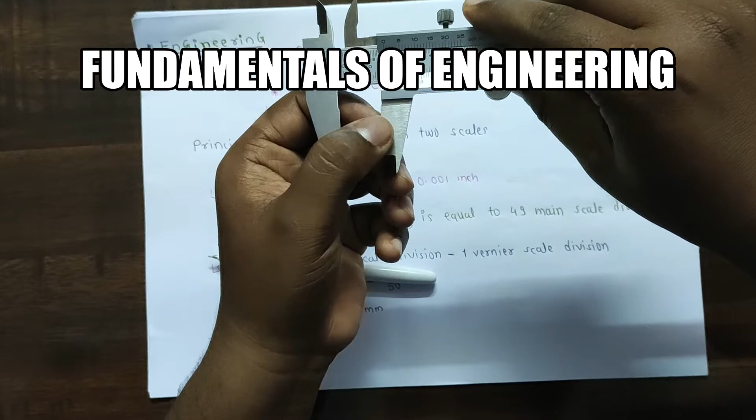This is the fine adjustment screw. This is the locking screw. The locking screw is used whenever we measure the dimension between these two jaws. We have to lock the dimension so that once you remove the part from the jaws, the dimension will not change, and then you can take the reading.

This is a depth measurement bar. Whenever we want to measure the depth of any part, we use this depth measurement bar.

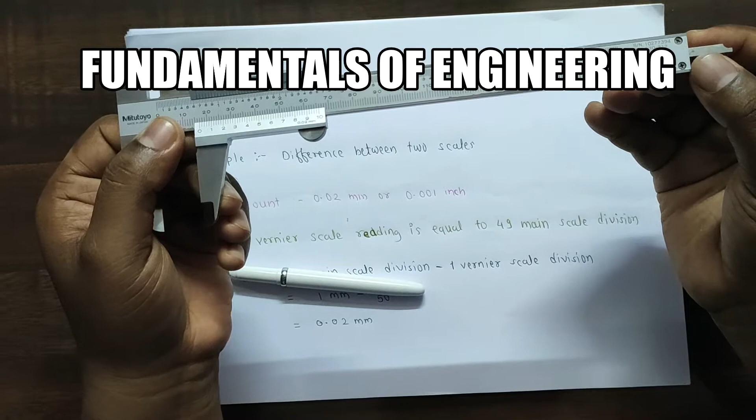Now the principle of the vernier caliper is the difference between two scales. So what are these two scales? This scale is the main scale and this is the vernier scale. The above scale gives the dimension in inches, and the bottom scale gives the dimension in mm.

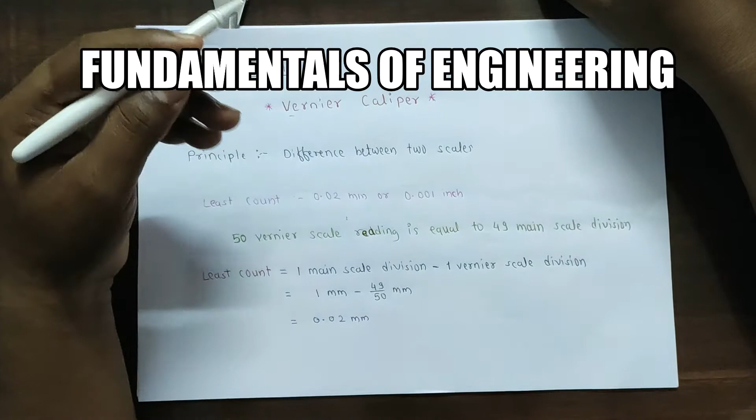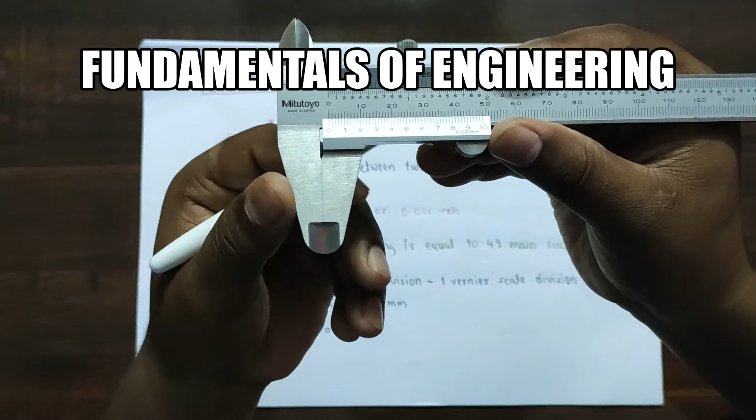Now we have to find the least count of this vernier caliper, which is 0.02 mm or 0.001 inch. How do we find this? You can see when I match the fixed jaw with the movable jaw, the 0 of the main scale and the 0 of the vernier scale are matching.

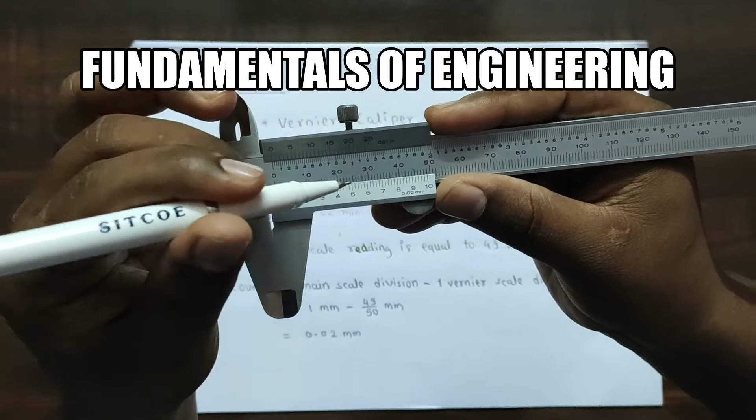This vernier scale has 50 mm divisions, and these 50 divisions exactly match with 49 divisions on the main scale. So 50 vernier scale readings are equal to 49 main scale divisions.

So we can find the least count as 1 main scale division minus 1 vernier scale division. One main scale division is 1 mm, and this 50 mm is matching with 49, so 49 over 50 gives us a least count of 0.02 mm.

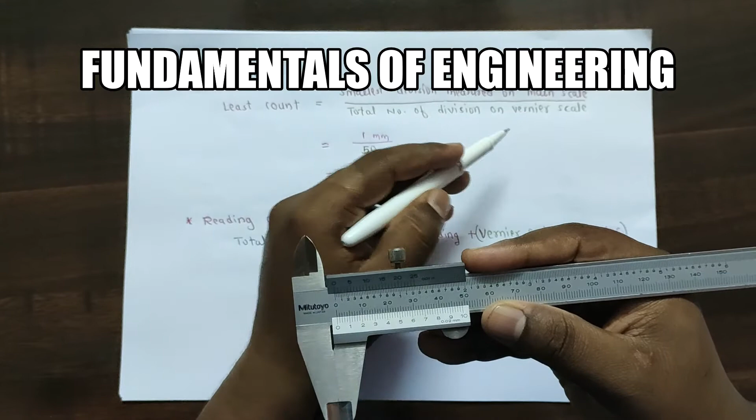We can also find the least count by another method: the ratio of the smallest division measured on the main scale to the total number of divisions on the vernier scale. The smallest division on the main scale is 1 mm, and the total number of divisions on the vernier scale is 50. So 1 mm divided by 50 gives us a least count of 0.02 mm.

So this is all about the least count of a vernier caliper.

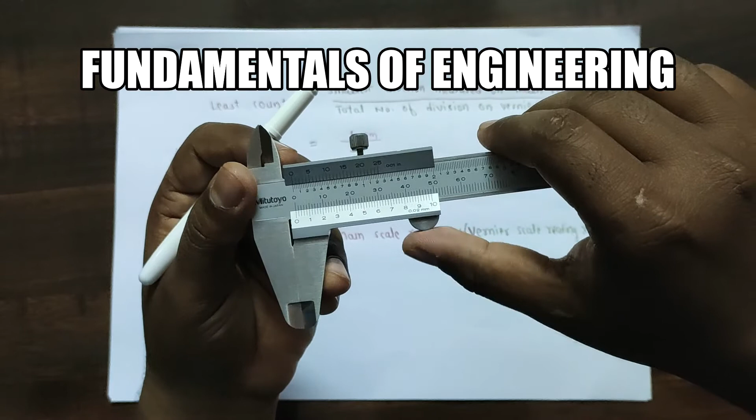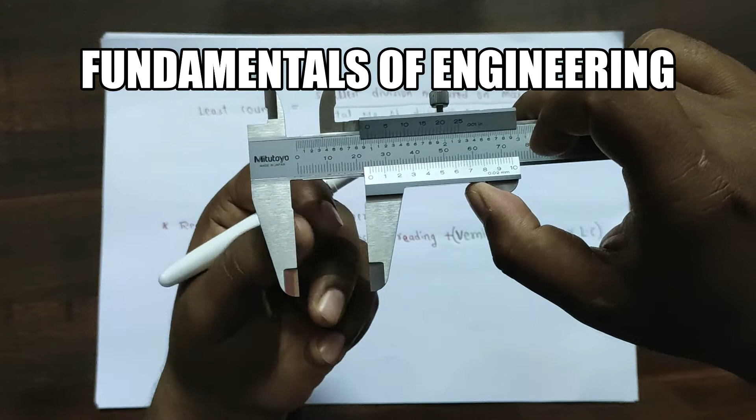Now if you want to measure a dimension using a vernier caliper, you have to move the movable jaw using the fine adjustment screw, and place the part whose dimension you want to measure in the gap. This vernier caliper can measure the length, height, diameter or depth of any part.

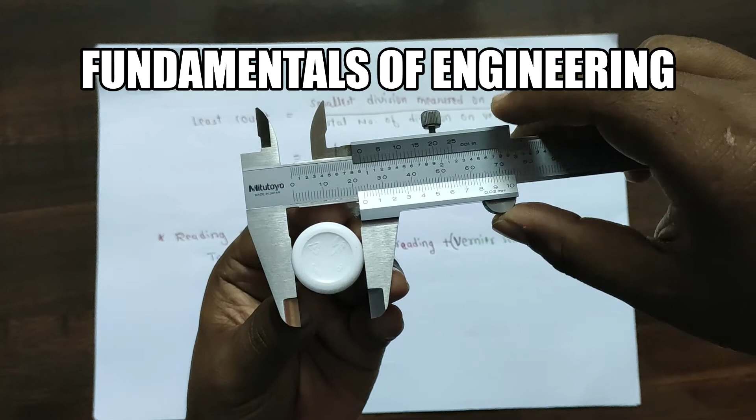For example, if you want to measure the diameter of this part, you have to adjust it between the two jaws and match them. Apply some gentle pressure, don't forcefully apply pressure, otherwise it will give a wrong result. Once you apply that small pressure, you lock the lock nut, then remove the part.

Now you have to take the reading of this diameter. For that you require two readings: the main scale reading and the vernier scale reading. First check which line of the main scale the 0 of the vernier scale is exactly matching with. You can see it is exceeding the 23rd division but not completed 24.

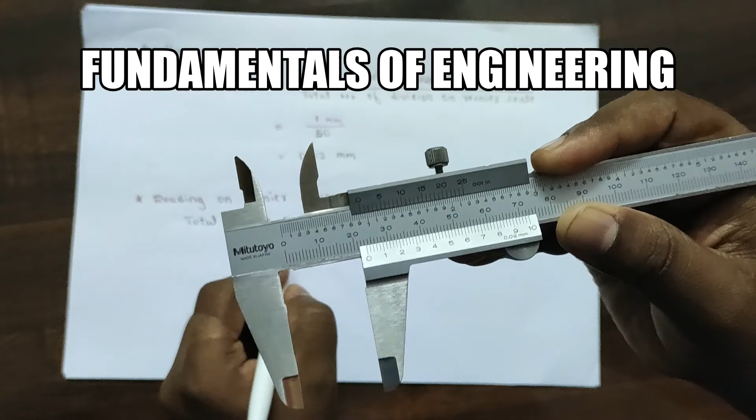So it is between 23 and 24, meaning it completed 23 mm but not 24 mm. So I am taking the reading as 23.

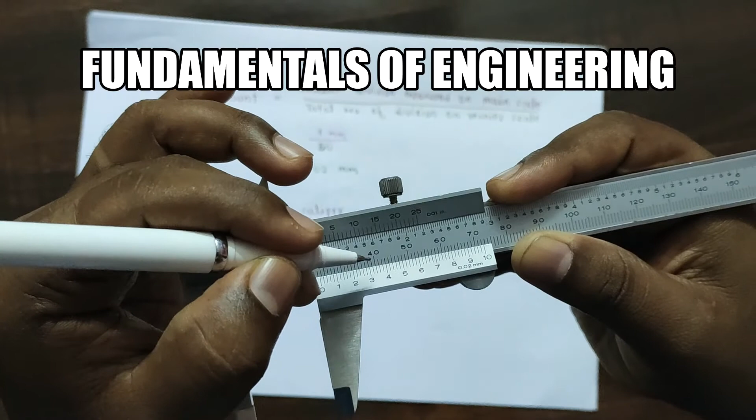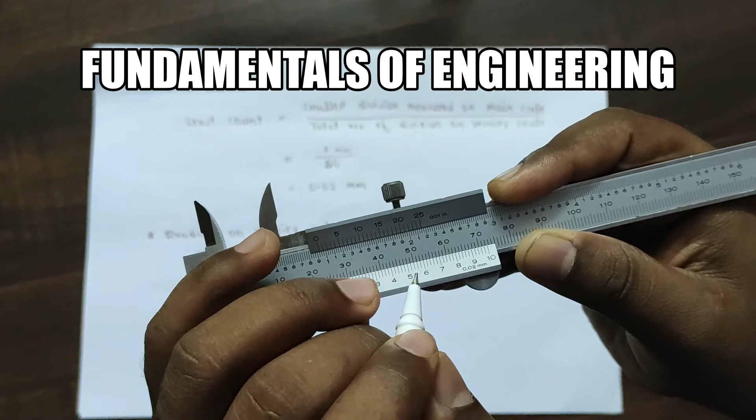Now next is the vernier scale reading. From the vernier scale divisions, check which line exactly matches with the main scale line. Now you can see, counting 5, 10, 15, 20, 25, then 26, the 27th line is exactly matching with the main scale.

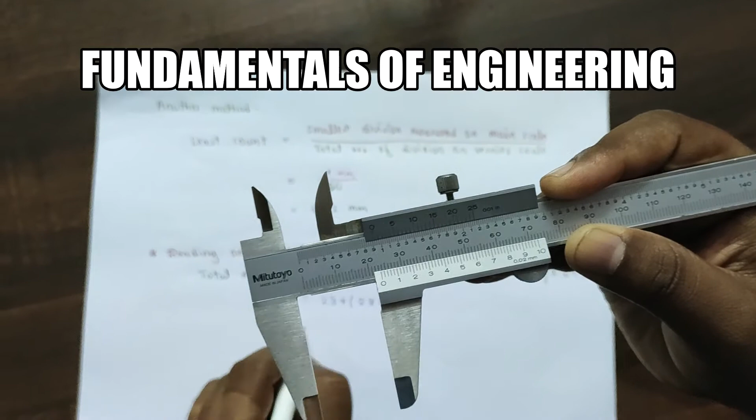So I am taking 27, then you have to multiply with the least count. So the reading becomes 23 plus 0.54. Once you multiply 27 by 0.02, you get the total reading as 23.54 mm.

So whenever you want to take a reading using a vernier caliper, you have to take two readings: the main scale reading and the vernier scale reading. First check which line of the main scale the 0 of the vernier scale is exactly or nearly matching, and take that reading.

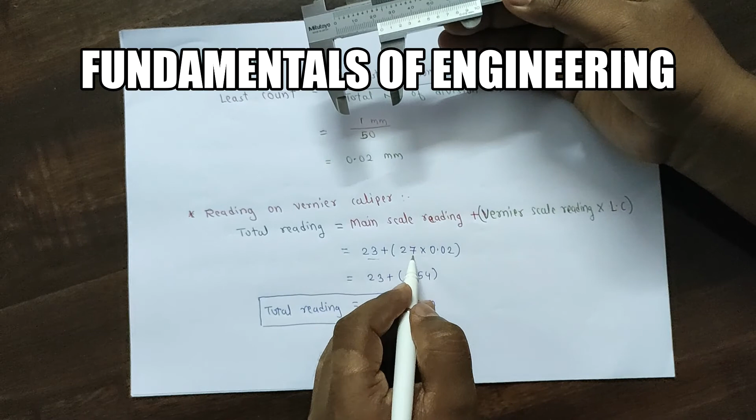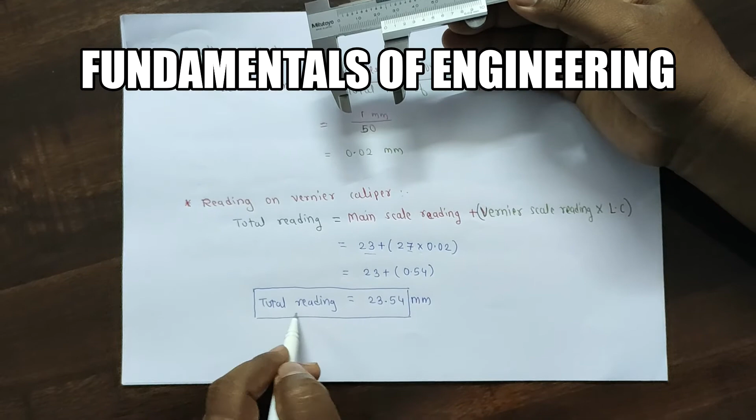Then check which line of the vernier scale exactly matches with the main scale line. Note that division, and multiply that vernier scale division by the least count of the vernier caliper. Then you will get the total reading. In this way you can measure the height, length, diameter or depth of any object using a vernier caliper.

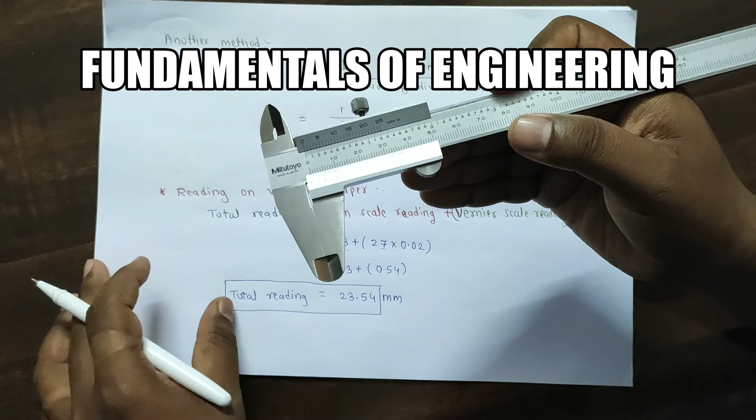Hope you like this video, and using this principle of the vernier caliper you can measure any dimension. This is all about how to take the reading from the vernier caliper.